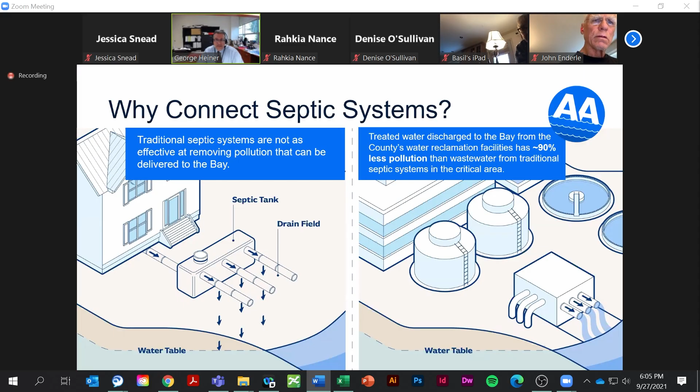If you go to the next slide, I think we have a comparison of that. Oh, sorry, I'll get to that. Sorry.

Anne Arundel County overall has more than 40,000 septic systems, 13,000 septic systems in the critical area. That's almost 25% of all the critical area septic systems statewide. It's a significant source of nitrogen in the county.

You can see on this chart that wastewater is 35%, stormwater 32%, septics is 13%. As I mentioned before, we have a robust stormwater program that's been making a lot of improvements. There have been a lot of improvements in the wastewater treatment sector, but we really haven't made any significant progress in reducing loads from septic systems. So that's really where the focus of this program component has been.

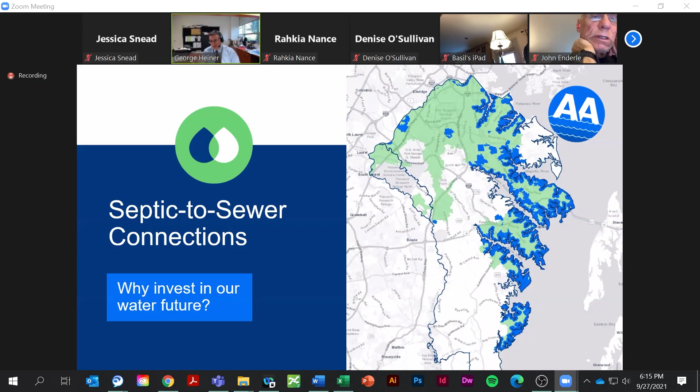The other is that it's in what the health department defines as an on-site wastewater management problem area. Another is that it's in an area we consider a septic connection area, which means an area where we've developed a conceptual layout. We've been looking at septic system connections for several years now, and we have concept-level layouts for a lot of different areas. So those are the key criteria, and you can see here on the blue areas, these are the areas eligible in the program.

So we'll go to the next slide. Our overall program is really about the need to protect our waterways and improve the environment and water quality. We've developed this new process, and we're going to talk a lot more about how it works, where a neighborhood can show interest. We've developed an application process, and we're going to talk through different funding options and the petition process. So there's a new, modified process on how to make that connection.

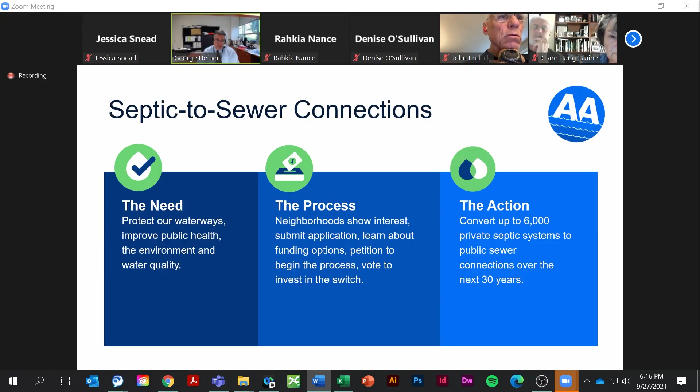Our overall goal in the program is to connect 6,000 septic systems over the next 30 years. So we're hoping to connect about 200 homes a year, which is a sizable number. But if you recall, I mentioned earlier we have 40,000 septic systems in the county, so it's not necessarily the majority by any stretch.

Should we go to the next slide? So just a little bit of background on the septic connection program.

Our initial concept planning started many years ago with an earlier version of the Chesapeake Bay total maximum daily load requirements. At that time, the septic sector reduction goal was approximately 50% reduction in septic system discharges. So we started doing a lot of planning to figure out if it would even be possible to hook up 20,000 of the 40,000 septic systems. Some of the cost information you'll see tonight, and the general layout areas, are related to these early planning efforts from that earlier program work.

We then had a septic task force that was initiated, with citizen participation from business groups, environmental groups, and some community groups. We talked about a lot of the challenges we were facing with this septic connection program, and we looked for input on policies, prioritization criteria, subsidies, and incentives. The work of that septic task force culminated in legislation passed at the end of last year and early this year to create subsidies for certain eligible areas and deferments. We're going to talk a lot more about the details of how that works.

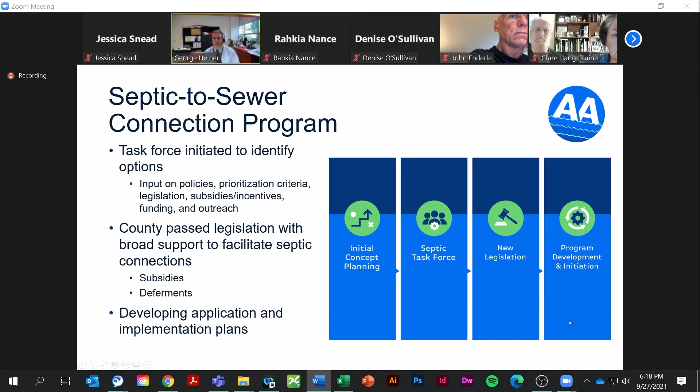I mentioned a little bit that you needed to be in an eligible area. This is the same map we had a little bit earlier. The green area is all the county's planned sewer service area. The blue area are the eligible areas in the program. You're also considered eligible if your project area includes an eligible area. So in this area, the Pendennis Mount area, it's eligible because it's in the critical area. It doesn't mean every single property has to be in the critical area, but it does mean the project area would have to include the critical area.

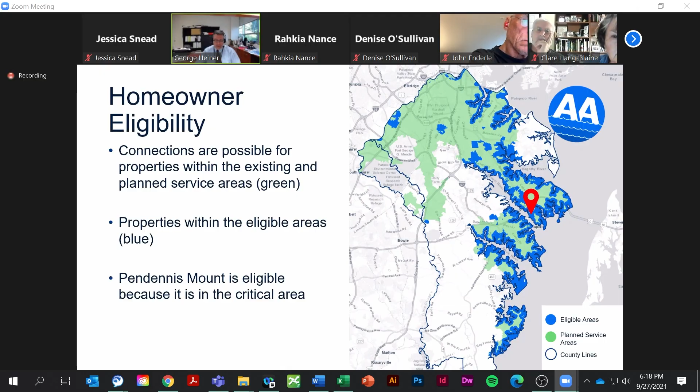Let's go—oh, you already switched it. Sorry, there's quite a few questions in the chat. I'm going to scroll back up. You addressed what the critical area is. There was another comment asking about 35% nitrogen load from wastewater plants.

Okay, so the critical area definition—I'm looking this up now—it's land within 1,000 feet of tidal streams. Okay, I think someone may have already responded to that one. Please go back to a couple of slides, the load from 35%.

Rahkia, could you use slide 9, please? So this chart was showing the way the load delivery—it's not too complicated, but it's not that straightforward either. Let me make sure I'm on the right slide. I think they were wanting the one with the pie chart.

This pie chart—so the wastewater plant at 35%. Yes, so this slide was taken from the state's, what the state has now issued, what they're calling a Phase 3 watershed implementation plan. And it has 2017 loads from the different sectors. So that's where this chart was taken from. So was there a particular question about this slide? It looks like the comment was asking to confirm.

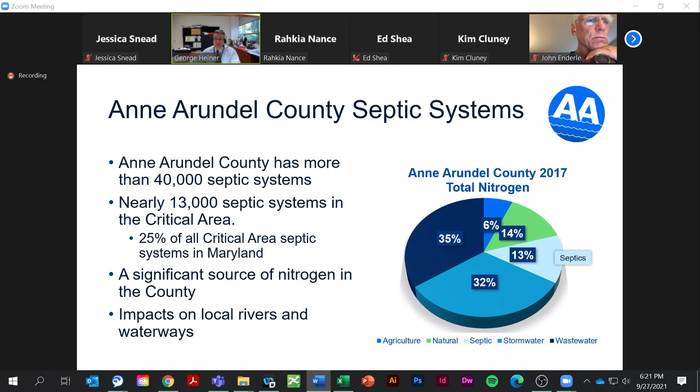And I see some comments about wanting to get to the costs. We're definitely going to talk a lot about the costs—the majority of the presentation is about the costs. So just bear with us while we get through the other questions.

All right, and the next question: how far below ground level is groundwater level, specifically for Pendennis Mount? I don't know the answer to that one, we'll have to look that one up.

All right, and we had a resident commenting on septic costs—septic pumping usually closer to $300 each pump, every 2 to 5 years. There's a comment about gallons of raw sewage being spilled into Mill Creek and the Magothy River and other local creeks. Do well-maintained private septic systems pose less of a threat to the bay than locally managed wastewater treatment facilities? My guess is that our collective neighborhood nitrogen load is substantially lower than the local public treatment facilities load.

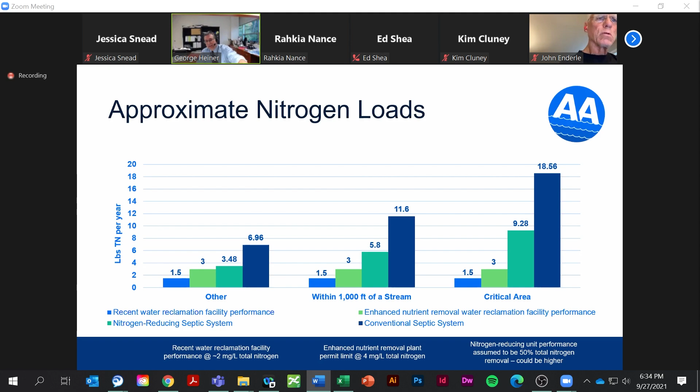So I hope I'm not getting too granular, but that's what's underlying the pie chart. Describe, George, the non-point source. Yes. Can I add to that just a little bit? Also, keep in mind that the county currently has, I think, would you say 40,000 households that are on septic units. And the water reclamation facilities are handling about 140,000 households. So, of course, their numbers are going to be higher even with a lower discharge limit due to the quantity of waste that they're handling.

Describe the non-point source analysis, please. How do you know the sources of nitrogen? So the numbers that we're presenting tonight are coming from the state's basis for estimating nitrogen loads from septic systems. Their typical assumption is 23 pounds per household, and then they use these delivery ratios to estimate the impact on the waterway. I'm not actually familiar with the details of how the state developed that 23.2 pounds per household number, but that's where those numbers are coming from. And the state has been using methodologies like that throughout the Chesapeake Bay program development in terms of the phase 1, phase 2, and now the phase 3.

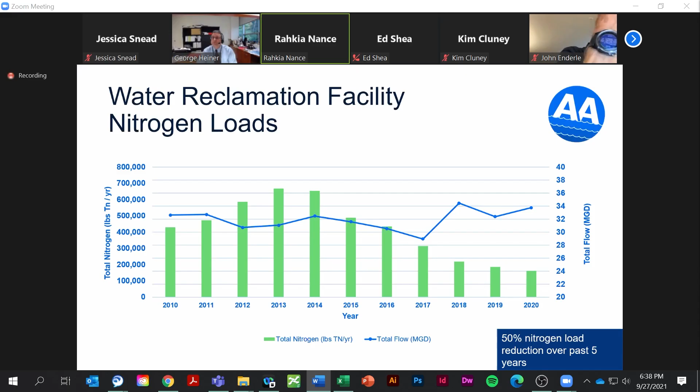We had an earlier question about what the layout would look like, and that we would need multiple pumping stations. That's an accurate statement. There's a couple different areas, and when we're showing these maroon colored boundaries, these are from the concept layouts we did many years ago. As I mentioned, we started looking at whether it was possible to connect up to 20,000 septic systems.

So we don't have any specific project in mind. As Rahkia said, this is just an informational meeting. We're trying to let people know what the program's about, how it works, and roughly what we think the cost might be. In this particular area, the connection point is up at Whispering Woods.

So there would have to be a series of pumping stations that would need to go together, which would make this somewhat complicated area to serve, not impossible, but it would kind of be interlinked, I guess, is probably the best way to explain it.

We have a blow up, I think, on the next couple ones. This is a little bit more detail on some of the areas so you can see. We developed these layouts based on a very concept level assessment, looking at the topography and whether we could drain areas to a centralized pump station. We did not look at any existing neighborhood boundaries or HOA boundaries or anything like that—this is really just an engineering level assessment of what seemed feasible.

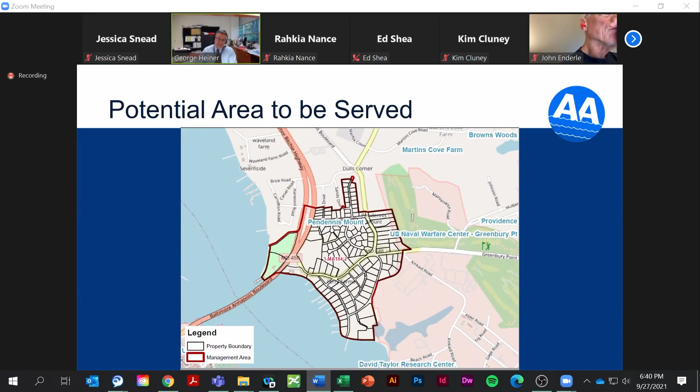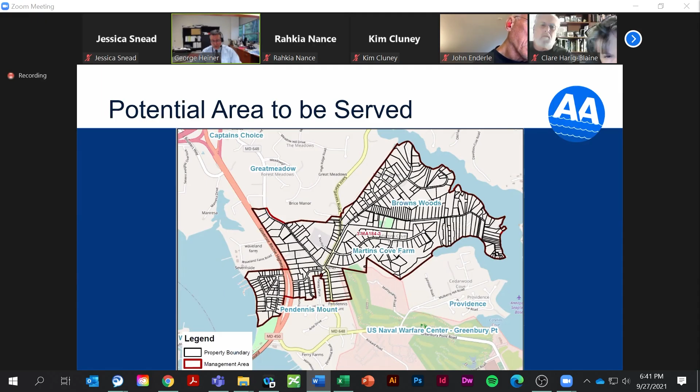One thing that's a little different in this area is that we really want to be building our system from the existing infrastructure out, so they'd be going kind of from Whispering Woods back to the southwest. That means this project, if it was all of these areas—and it doesn't have to be all those areas—would need to sort of be in different stages.

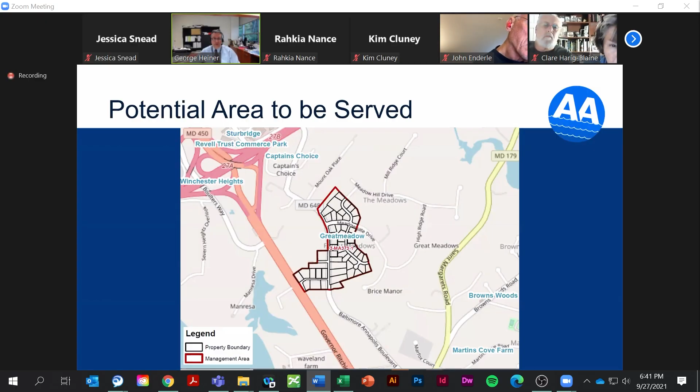Okay, so our next is a pause for questions. I know we have a lot of people that want to see the cost, because from all our other presentations, that's what people are really interested in. I know some participants want to discuss the relative merits of the different sources. What I'd suggest is that we go through the rest of the presentation this evening, at least about the costs and the questions about nitrogen sources and why we're looking at septics. I'd be glad to stay on after the presentation to talk about that in more detail. We have some other backup slides, but we still have quite a few slides to go through, so if I ask you to bear with us—I think there's a lot of people who want to hear about the costs, and it would probably be better to move on to that point, and then we can come back to sector specific questions if you have them later on.

So with that, I'm going to hand it off to Ed Shea. Ed's with HDR, a consulting firm that's been helping us with a lot of different aspects of this program. Ed's going to describe the different costs involved in making a connection and potential funding for those costs.

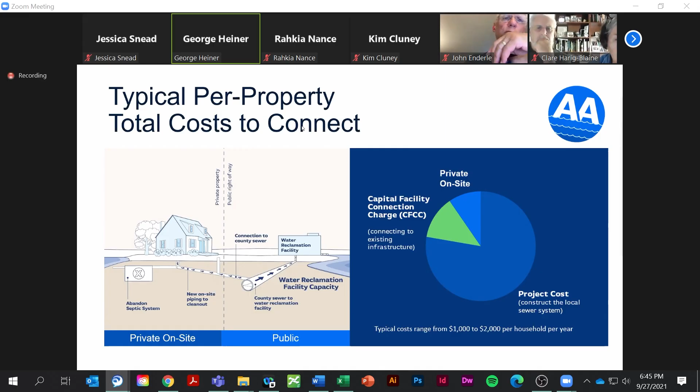If you go to the next slide, so we frequently get a question about what happens to septic tanks. What happens to my septic tank? So your septic tank has to be abandoned in accordance with the health department's requirements when you make that connection.

This requires the services of a licensed disposal contractor and a liquid waste hauler. We have the link there to the health department's more detailed requirements, but essentially the systems can be crushed or filled and abandoned in place. They don't have to be physically removed.

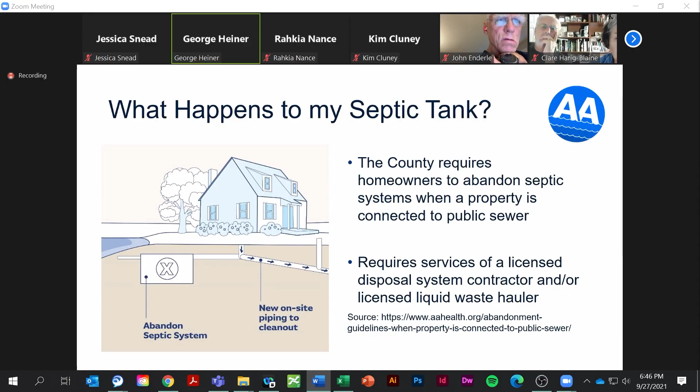So if you go to the next slide, we're showing on this slide the average costs per household for all of the different layouts that we had done. As you can see, there's sort of a curve there. In this particular region, the projects are expected to be more costly because of all the pumping stations that we talked about. So we'll have a little bit more detail about this.

I see someone in the chat was commenting about a presentation we did on another meeting. I'm not reading that closely, but here's what we've been doing.

We've developed these concept level layouts and costs. So we have some idea of where we think the costs are going to be within a particular area based on these layouts that we've done before. Usually what we're doing is showing this graph, which is the aggregate graph of all the areas that we looked at, and we're trying to show where we think your neighborhood is relative to other ones. In this case, this is on the more expensive side because everything has to be pumped, and there's a longer connection to get up to Whispering Woods.

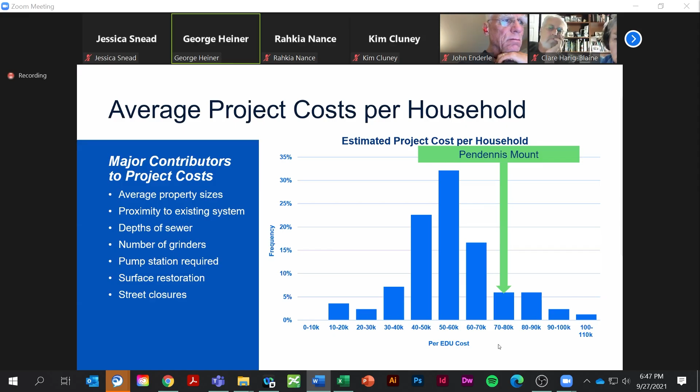I mentioned there haven't been a lot of connections over the years, but there have been some connections. The health department shared with us that they administer the Bay Restoration Fund. We'll talk a little bit more about that for septic connections. And so we made a chart that really tried to show what frequency some of these costs are.

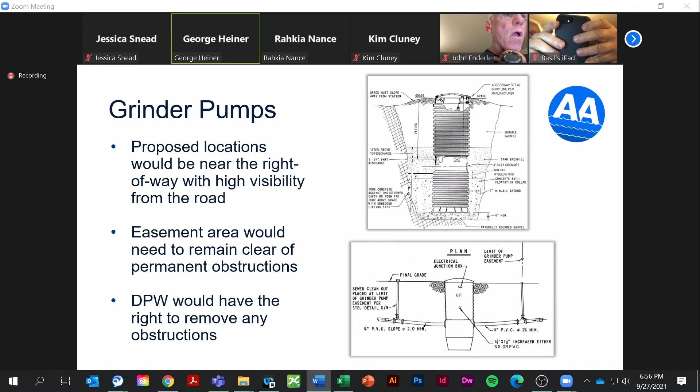So let's get to that piece, because I don't think we've even got through the rest of the funding stuff. I see some other questions about the septic system sector, and I'm going to come back to those if that's okay with the group here. I think I'd like us to get through the cost information so everybody can see that. And again, I can stay as long as anybody wants to talk about the background of the program and why we're working on septic systems.

George, this is Ed. I'm back if you want me to pick up this next group of slides. Yeah, that would be great. I need a drink of water. Thank you.

And I'll just mention the comment about grinder pumps. We do expect a significant number of grinder pumps would be needed to serve this area just because of the topography. And I know there was that one question in the chat earlier about raising the level of the sewer in the basement. That's the type of situation that would normally be handled with a grinder pump. So you'd have to avoid the disruption inside the house, but then you have the grinder pump outside the house to handle that.

Okay, so potential funding sources. The Septic Task Force that George mentioned earlier initiated legislation to allow the county to offer a subsidy for a percentage of the project cost. So that's the public side cost to construct the sewer in the right of way, the main sewer.

The state has a fund that homeowners pay into now. The Bay Restoration Fund is the name of that fund, administered through MDE and currently through the health department. Bay Restoration Fund grants can be used to offset the on-site costs and also to offset the capital facility connection charge. So the idea here is that the upfront cost, as much as possible, could be handled by these existing grant programs. The county is working with the state to also help offset some of the assessment, which is the portion paying for the public sewer construction. And the county is also looking for ways to take advantage of state revolving fund loans and other low interest loans to keep that assessment cost as low as possible.

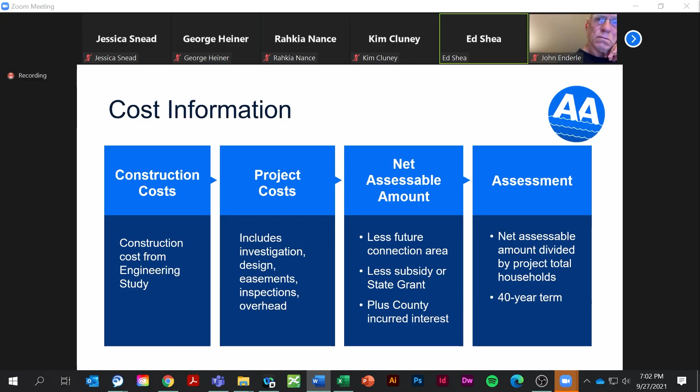So in particular, the Pendennis Mount community and the adjacent communities are somewhat interdependent. Depending on the project that was formed and those interdependencies, if there's a sewer going through the neighborhood that benefits other neighborhoods, if it was sized to handle the flow from other neighborhoods, that will be subtracted out from the net assessable amount for that particular community. Then interest also gets rolled into that net assessable amount and is formed into an assessment that's paid over 40 years. Previously that was paid over 30 years, but the new legislation made it possible to pay over a 40-year term.

And then just a few assumptions on the assessment. Again, it's a 25% county subsidy for households up to $300,000 a year income. There's an option to defer up to 50% of that payment, and we're going to go through that in more detail in a few slides. For elderly, low income, or permanently disabled—the county's definition in the code of elderly is 60 years old, we usually get a couple laughs out of that—that would enable somebody to defer 100% of their assessment to the future. And then there's $15,000 in BRF funding available for on-site costs.

So for household income greater than $300,000, it's a half subsidy, option to defer 50% of the costs, and just half of the BRF grant funding is available, $7,500. Vacant lots do not get a subsidy, they're not offered the deferment, and they are not eligible to receive a BRF grant.

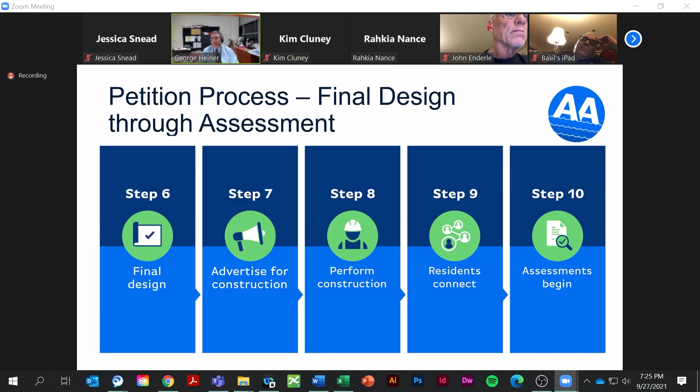Related to that, a resident asked if we could be more specific about what the project area is. Let's go back to the area map. I want to emphasize that we don't have a proposed project right now — there's not a DPW proposed project.

These boundaries were really from a planning effort we did several years ago, when the original state guidance was that the county needs to reduce its septic system loads by close to 50%. So we went back as part of that planning effort and tried to look at where there could possibly be 20,000 septic systems that could actually be hooked up to the public system. That's where these boundaries showed up. We had some different criteria for how we drew them, which we could probably adjust if we were doing it today.

There was a question about why some areas were excluded. The most common reason an area was left out of one of our layouts was a lot of large lots. When we first did these concept layouts, we figured if the lots were more than, I think, half an acre to an acre, the project probably wouldn't be cost effective, so we'd cut it off there. We needed some criteria to come up with layouts, but at a granular level, it's a bit wanting in some cases, so we'd look more closely at this if we had an actual defined area.

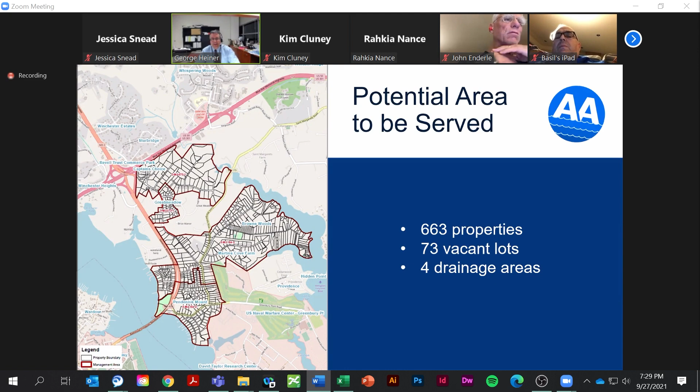But we're going to go in a few seconds and show you. Why don't we just go to the community page? So we've set up this community page within our water page, and you can get to it with the link shown. You can share this with folks. What should be on here now is the slides from tonight's presentation, and probably within a week we'll post the recording as well. So we'd definitely encourage you, if you have neighbors who couldn't make it, to go to this link so they can see the presentation and look over the information.

There's also a box where you can let us know whether you're interested or not interested, and any comments about the presentation tonight. As I mentioned, we've been doing a lot of these throughout the summer, so if there were pieces that were unclear, please let us know, because we really want everyone to have the best information they can.

So a couple of people I can see didn't get the mailer, so I apologize for that. We'll try to figure out what happened, but the link is probably going to be the best place to get information going forward.

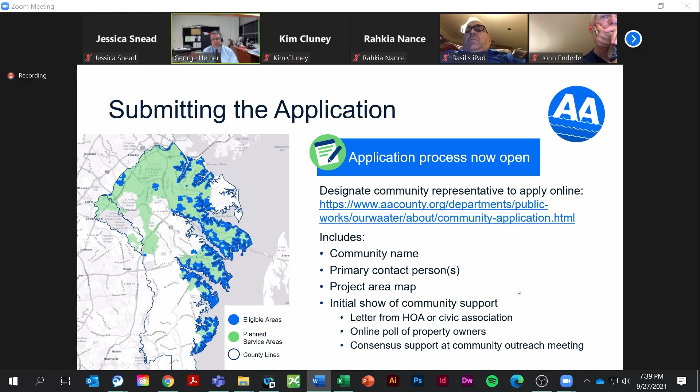And sometimes, let's go to the next one—sometimes we get questions about how the applications are ranked.

So we did develop a ranking process for applications. This helps us steer subsidies toward the projects we think will have the most impact. It looks at things like total nitrogen we think will be reduced, how many properties are in the critical area, how many are in on-site wastewater problem areas—though I don't think there are many of those in this particular area—and the dollar-per-nitrogen cost, among other cost metrics. We also look at vacant lots and how many households would need grinder pumps. The county owns and maintains the grinder pumps, so all things being equal, we'd rather not see a lot of them. It's not a significant factor in the rating system, but it is a consideration.

If somebody's saying it's not a wastewater disposal problem area, okay, I don't remember seeing it as one. So that's the main presentation for tonight.

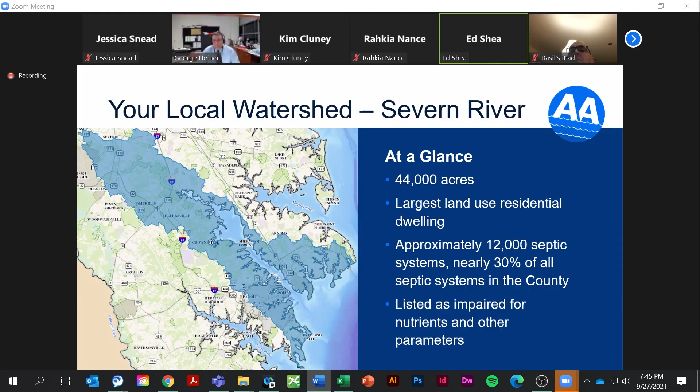Ricky, do you think you can jump back to slide 11?

The broader public benefit, which is sort of where DPW is interested, as the entity that is tasked to try to stay in compliance with the state's guidance and requirements, is that as we're able to connect more septic systems, we're going to significantly reduce the load in those areas, bringing it to the local waterway. As I mentioned, this watershed has a lot of septic systems and it's listed as impaired. So septic system connections, and going to those treatment plants, are going to reduce the load in some cases by a factor of 4, and make some incremental progress for the waterways.

For the individuals, can you go to the next one?

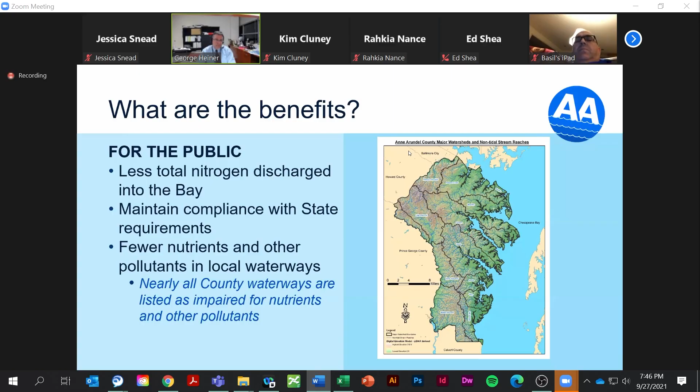So these are very site specific to your property, but it's worth thinking about. And the first one I was mentioning is that in some cases, the ability to expand your house is going to be connected to your septic system.

Your septic system and the drain field may be sized for your existing house, and some people can have an issue if they want to do an addition or something else where their septic system becomes a problem. That can depend on the soils, it can depend on the size of your lot. There's a lot of different things that can come into that.

The other benefit we were talking about is that your drain field, however large it is, is taking up space in your yard. If you connect to the public system, that space is available to do something else. Now that gets into whether you're interested in digging out your drain field, and that's going to be the homeowner's decision. But you won't need that drain field for your public sewer system, because the connection will be out front and you won't need any of that stuff back there.

And we mentioned a little bit the home value impact. A realtor is the best person to talk to about that kind of thing. And I think that's also very site dependent. If you're on a lot where you can't do something from a building standpoint because of your septic system, well, it's probably more valuable at that point than somebody else who doesn't have those restrictions.

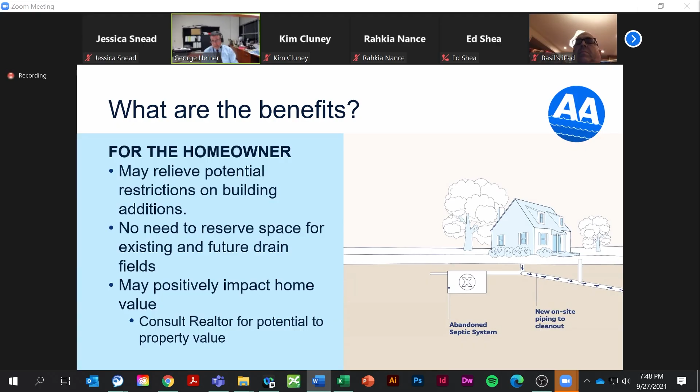Let's go to the next slide. So there can be a lower risk of contamination. This graphic shows the well near the septic system, but that's because we were just trying to condense the information on the graphic. What's a lot more common to see is the wells in the back and the septic systems in the front, or the septic systems in the back and the well in the front.

That's because you want to have a certain setback from your septic system so that it doesn't influence your drinking water well. So obviously, if your septic system is decommissioned and it goes to public sewer, that's not a concern, but that one only applies if you're on a private well. We mentioned the waterways a little bit, and then lastly, it avoids the maintenance costs.

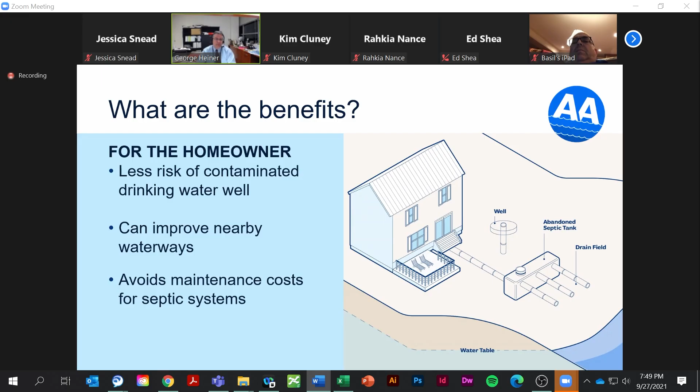If you go to the next slide. This was another one that is kind of site specific for people. Upgrading your septic tank can be costly. I think upgrading your drain field is more costly from the information we've seen. And you do have some costs associated with your septic system. It's not the same level of cost, so I'm not trying to say that, but there is a cost to owning your septic system.

If you have a BAT system, a nitrogen removal system, those are a little more costly to operate. I guess I want to add while we're mentioning this, this program, as I've said a couple of times tonight, is really intended to help people understand how the petition process works and the changes to the code to make it more affordable. If it's not a good fit for a community, it's not a good fit.

If people instead want to look at BAT systems, we're not here to bash BAT systems or nitrogen removal systems. If people are interested in that and think that's a better fit, we would definitely encourage that, because it's still a 50% reduction in nitrogen, and there's still a benefit to the waterways and to the bay, certainly from a nitrogen removal perspective. You do take on a little bit of higher cost with the BAT because it's a more complicated system. It's a lot more complicated than a traditional septic one, because it does some more advanced biochemical reactions going on in there.